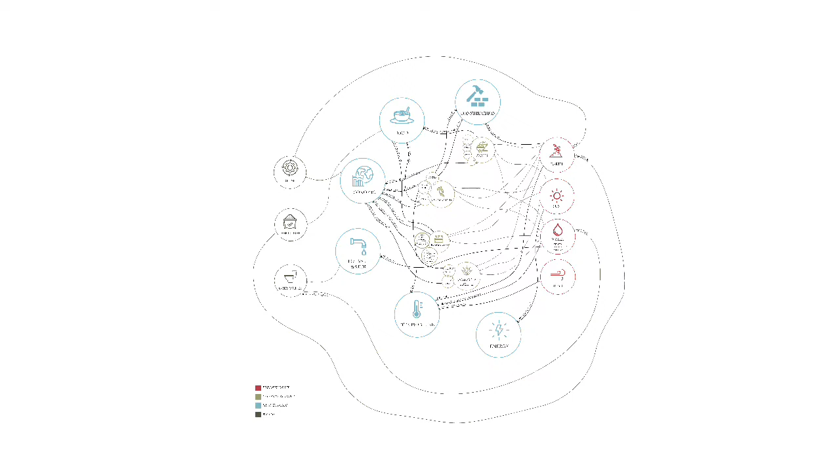There are various possibilities through which this oasis could flourish by only utilizing what the surrounding environment provides us with. Our proposal consists of 3 typologies that are an armature for the system.

These simple structures are modular designs that are highly adaptable, creating flexible space that can transform into whatever they are needed to be, without imposing an external identity onto the inhabitants.

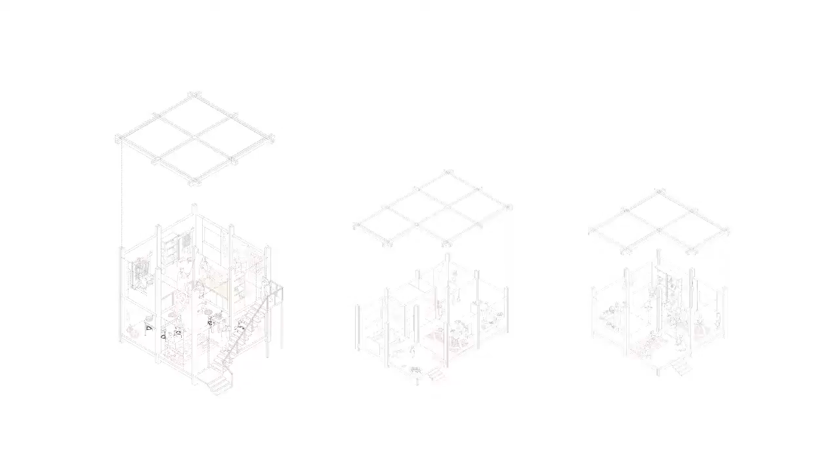These typologies will be constructed from materials found within the system: wood milled from the date palm grove and earth insulated with date palm leaves. Infill panels are placed on the exterior wall facades and assist in the collection of water and food production.

The first typology is the production or economic typology, which capitalizes on the skills and materials produced on-site within the desert climate and financially supports its inhabitants.

Moroccans have a strong tradition of weaving. The leaves from the date palms and the processed sabra silk from the Moroccan agave will be processed and woven for export, allowing the inhabitants to strengthen their cultural traditions and produce an income.

Excess food produced on-site, including agave nectar, spices, turnips, oranges, sunflowers, tomatoes, watermelons, and dates, to name a few, can also be processed and sold to surrounding villages.

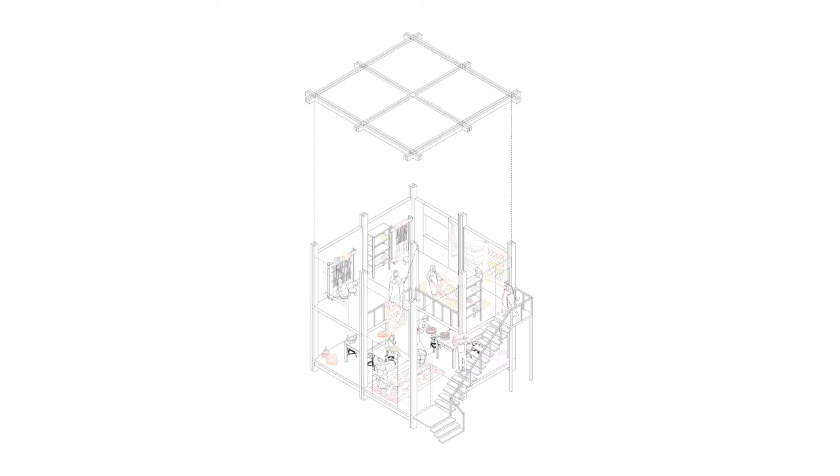The second module caters to the residents within the oasis, supporting a higher density within the existing area to accommodate more inhabitants and create a thriving oasis.

The last module is a cultural typology, providing space for people to come together to pass on skills and traditions of place. As an inclusive area, it gives opportunity for everyone to participate in the society and ensures that everyone's needs can be met through a sense of belonging.

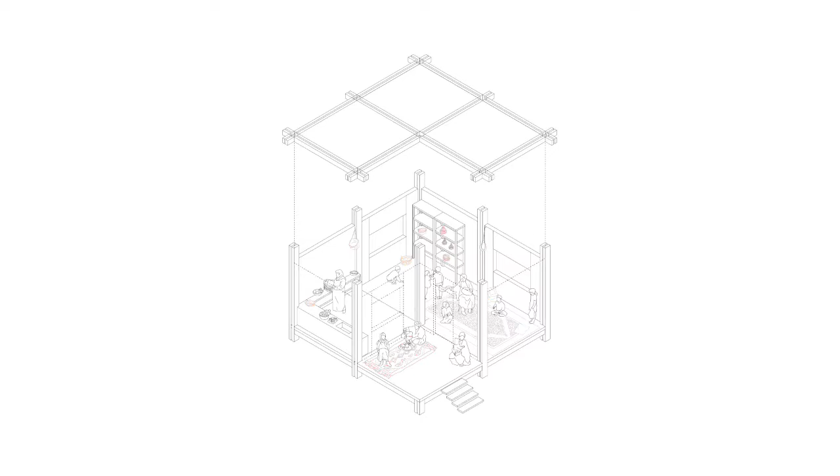The established system through the typologies will create an oasis perched on top of the existing ruins of the Ait Ben Haddou Citadel. Access to the settlement occurs through the towers located at the edge of the existing fortress walls.

These towers serve as vertical circulation for people and water distribution. This ensures a high level of permeability throughout the master plan.

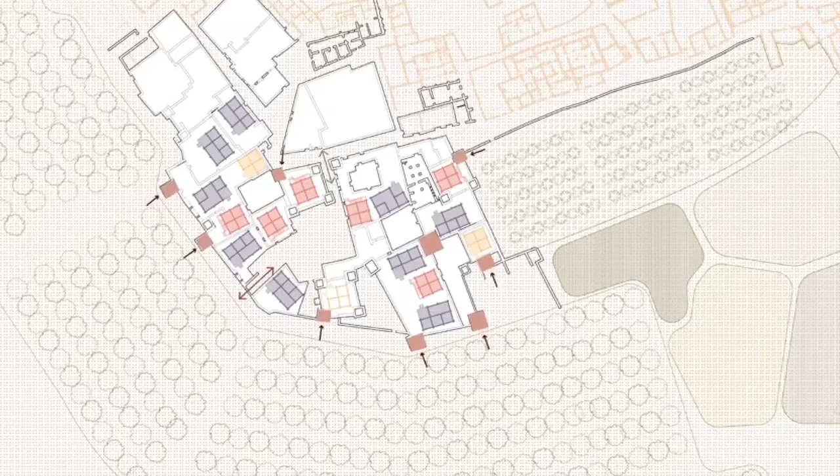Water will be sourced from a nearby aquifer that uses a traditional Qanat water system. The water will be transported up to the settlement via a series of solar-powered Archimedes screws aligned within the circulation cores.

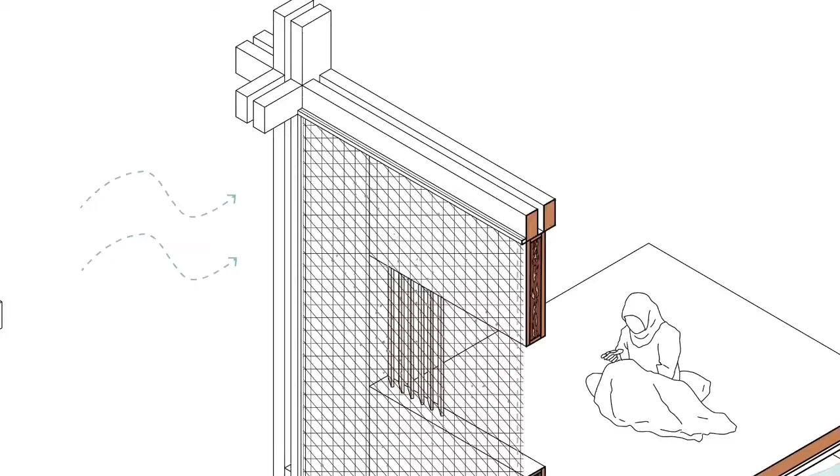Typologies also feature a water collection infill panel that captures the humidity from the air and collects it within dwellings, similar to the work undertaken by Warka Water and inspired by darkling beetles of the Namib Desert.

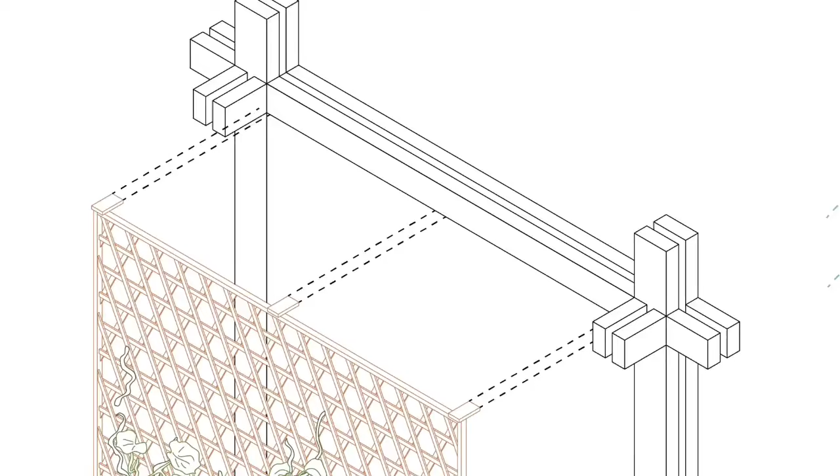Food will be produced in allocated spaces surrounding the site and the infill panels of the modules. Plants that can grow vertically and in desert climates, such as beans, peas, eggplants, cucumber, zucchini, tepary beans, pumpkin, paprika, jicama, will be grown in the infill panels.

Plants that require more soil and land, such as turnips, date palms, watermelon, tomato, sunflowers, and agave, will be grown in the surrounding land.

Sited in a desert climate, the area reaches a temperature high of up to 40 degrees Celsius and relative humidity of 60%, within the human comfort range falling between 22 and 27 degrees, and relative humidity of 40% to 60%.

Climate analysis has revealed that the climate is comfortable for only 20% of the year, making passive cooling throughout the design essential.

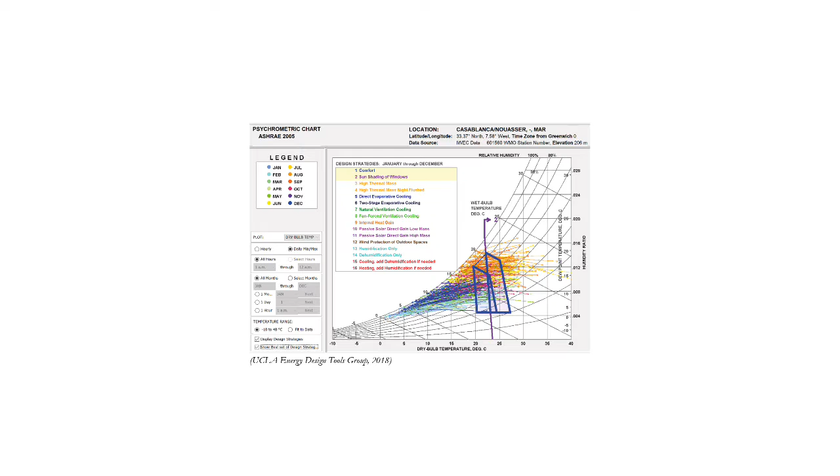The positioning of the village above the ruins allows for the optimal capture of the northern and southern prevailing breezes. The placement of the date palm grove to the south ensures that the warm winds from the Sahara Desert are cooled before reaching the oasis.

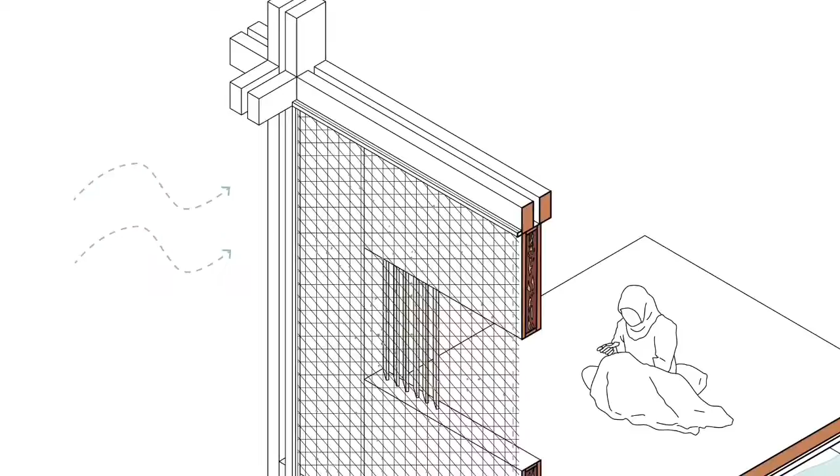The modules have been designed to allow for cross-ventilation through the spaces. The choice of formed earth as the primary material of the module ensures a high thermal mass and provides the opportunity for night flushing as a means of cooling.

The water collection system throughout the master plan provides opportunities for evaporative cooling, and sun shading on the windows assists in reducing internal heat gain inside the buildings.

Solar panels will be used to capture sunlight and convert it to usable energy to power the oasis. Solar panels will be placed on the modules in addition to a more extensive solar power farm outside of the settlement to support the energy requirements.

As a precious commodity in the desert, water will be treated at a biolytics biopod that uses tiger worms and microorganisms to convert raw sewage and wastewater to high-quality irrigation water for the date palm groves and agricultural fields.

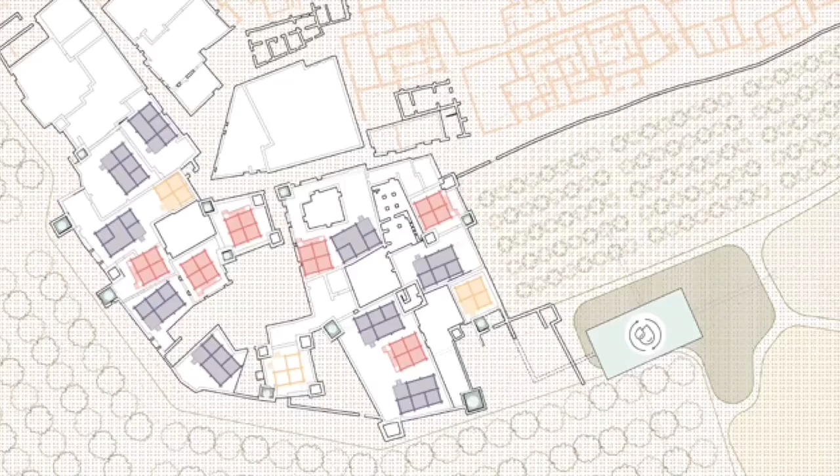Waste from the production modules, particularly food processing and weaving, can be used as fertilizers to enrich the agricultural production.

These simple structures act as modular systems that are highly adaptable depending on the usage required. They respectfully add onto the existing citadel without any disruption, retaining the language and essence of the historical site.

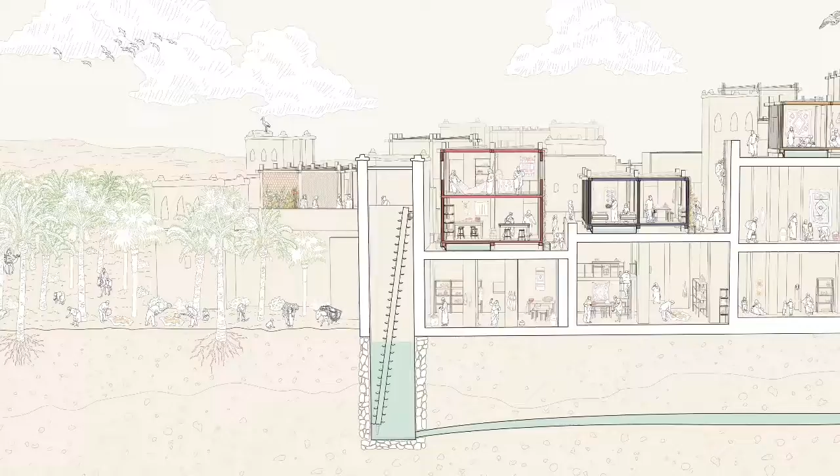Utilizing natural resources and environmental considerations enables this design to naturally grow as an ecosystem within a desert climate, making it an oasis that meets any requirement of the human needs of its inhabitants and ensures cultural and economic progress.